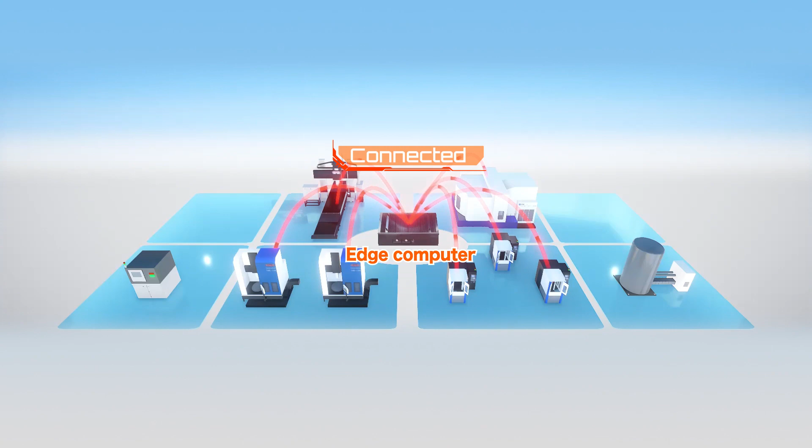machiNet will integrate and store digitized machine information into the edge computer to provide visible vibration and other data on the dashboard. It will also prevent sudden failures by monitoring aging parts with vibration sensors.

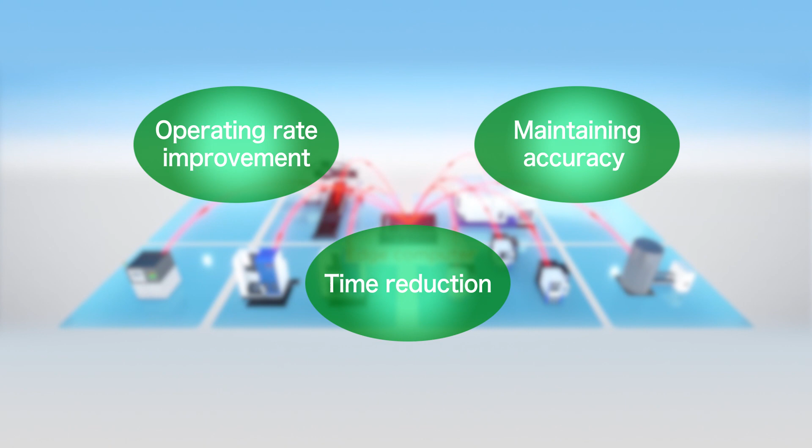Data from sensors and other devices, as well as peripheral equipment, will be added and analyzed coordinatedly for leading to more stable machining quality, reduced power consumption, and improved productivity.

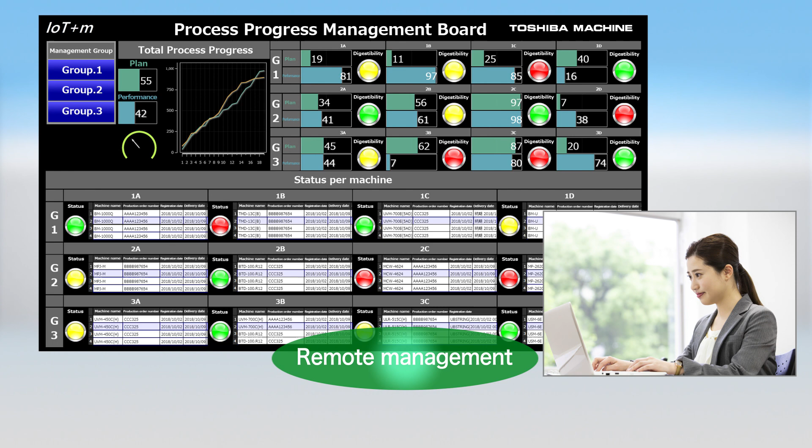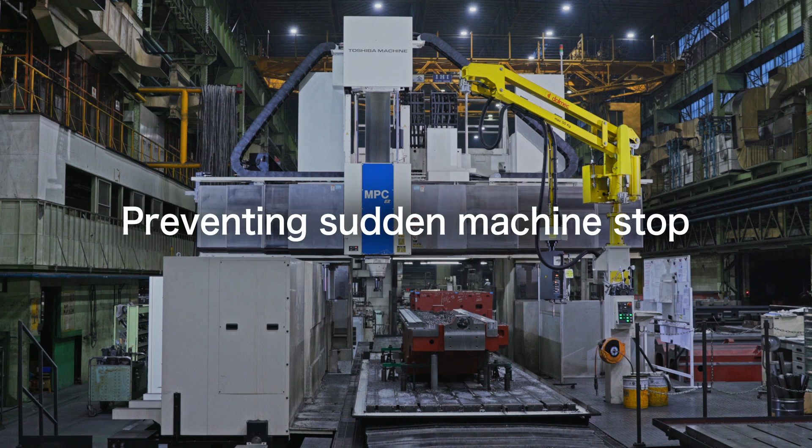Production and other data on the dashboard can be managed in an integrated way from anywhere. Data analysis and diagnosis will also help predict machine degradation and failures. This predictive maintenance provided to you will allow for periodical maintenance prior to failures, resulting in improved productivity.

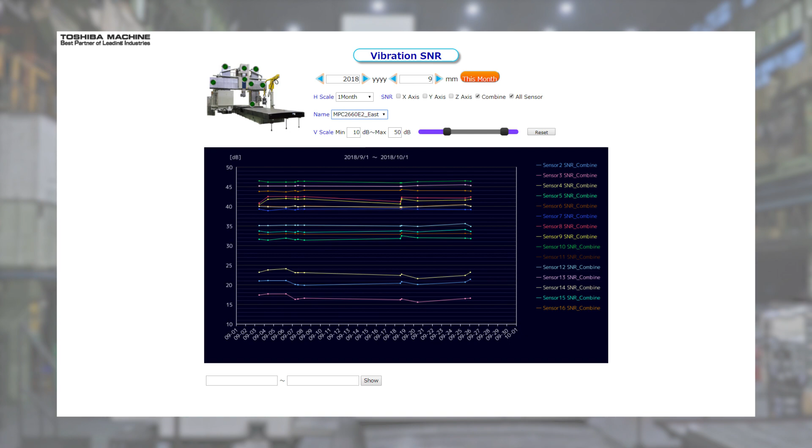The vibration sensor monitoring feature will compare collected information with data from normal machines to detect abnormalities. Monitoring of machine operations and power consumption cuts standby power and improves the operating rate.

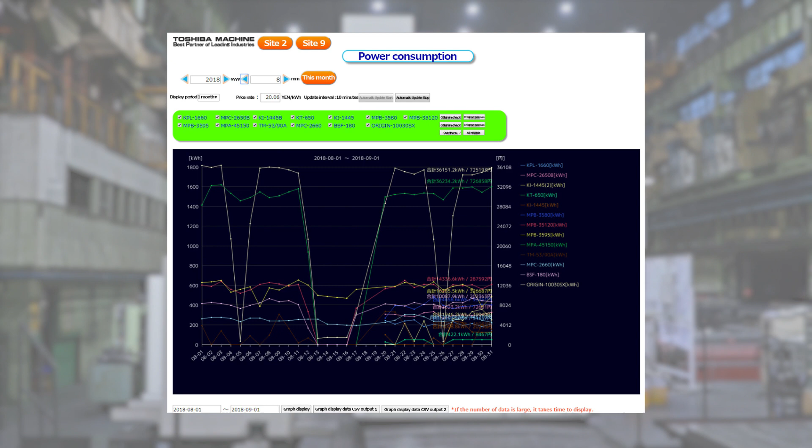Temperature control leads to machining quality improvement and stability. Such various remote control features will help manage distributed production facilities.

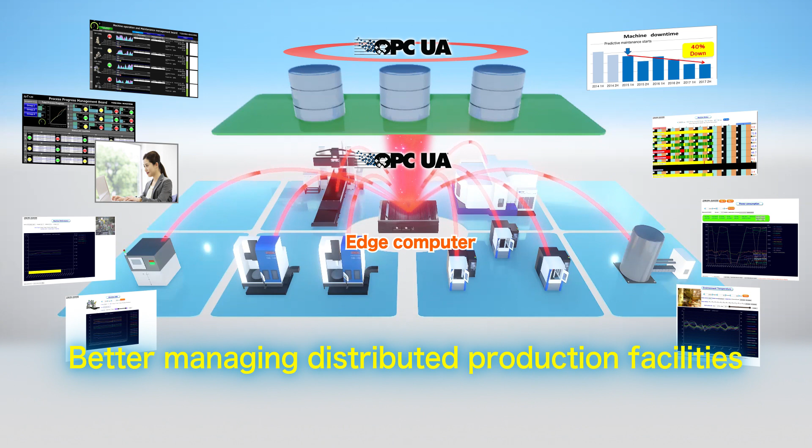Integrated and stored data can be extracted as necessary to be used for customers' upper computer by the OPC-UA Open Communications Standards.

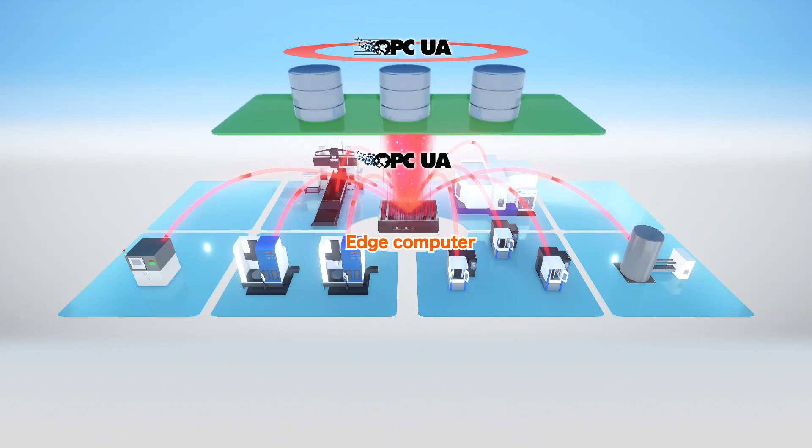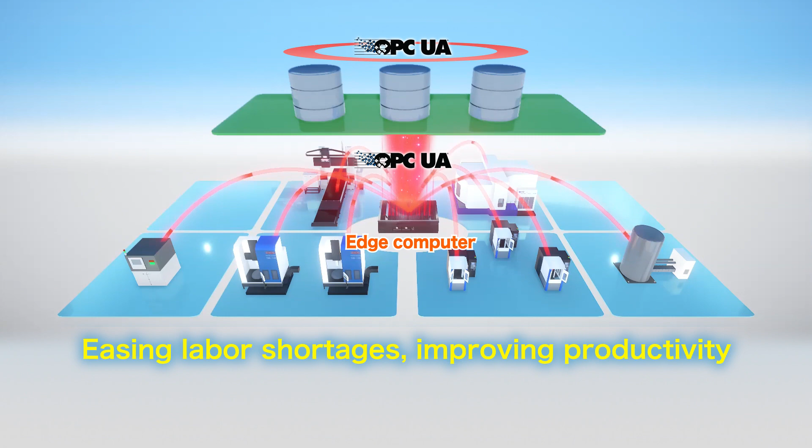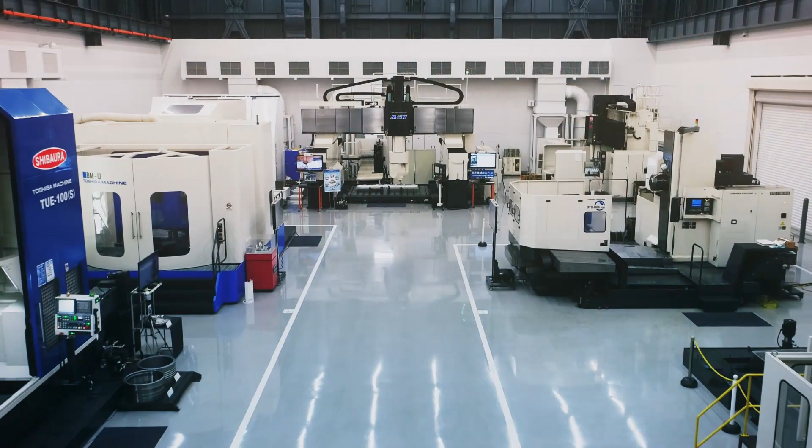Coupled with the MES, ERP, and AI systems, machiNet will optimize production at customers' plants. Toshiba Machine will continuously contribute for various smart facilities and value maximization at customers' plants through such efforts as visibility, analysis, and use of AI.